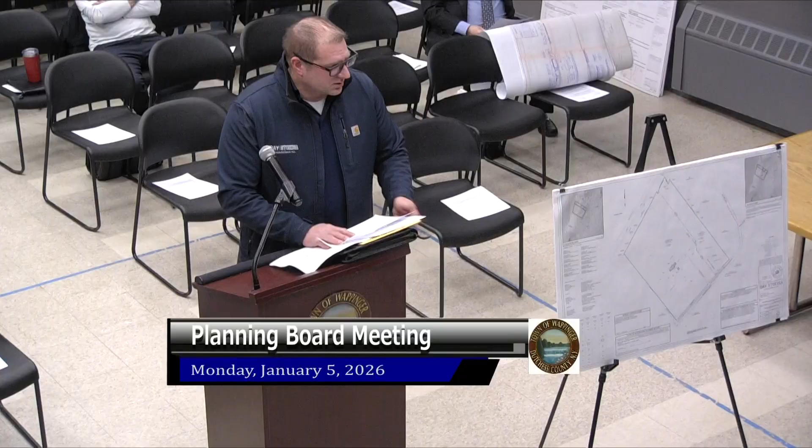Good evening, Brian Stokosa, Day Stokosa Engineering, here tonight. The applicant's here, Craig O'Donnell's in the audience. What we're proposing is we're starting with 2 lots and ending with 2 lots. We'd like to realign the vacant parcel along Wheeler Hill Road to give it a little bit more lot width for a larger style of home. There's no intent to build at this time, it could be for a grandchild or future relative, but there's no intent to design right now or construct. It's just to reshape the lot to accommodate a larger house. So that's what we're here for tonight, and we'll seek any public comment.

Okay, all right, so why don't we open up the floor for public comment? Is there anybody in the audience that would like to speak this evening regarding this application? Come up to the podium, please, and state your name and address for the record.

My name's Christopher Zaleski, 8 Skytop Drive, and I have formal copies of paperwork to submit to you all. Who should I bring that to? Hold on, let me ask you a question, you want to talk about the subdivision that's being proposed on Skytop Drive? That is correct. Currently this is a lot line realignment which is on Wheeler Hill Road. Oh, okay, that'll be coming up on the agenda next. Can I deliver these now while I'm up, or hold on to them? Just hold on to them, yeah.

Okay, so is there anybody else in the audience that has any comments? Yeah, I'm Craig O'Donnell, I live at 640 Wheeler Hill Road. I'm the applicant and owner of the property. I came here tonight to basically correct some misconceptions of what's going on down there.

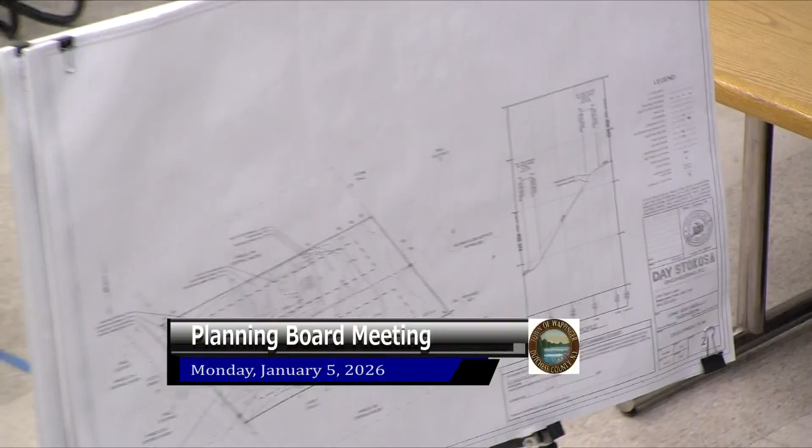This project was in front of the board previously. It's a single lot with an existing house on it along Skytop. Skytop Road is served by Central Water. The applicant would like to split the lot in half to create a new house for himself. The intent is to connect to Central Water with an on-site septic system.

The biggest thing we talked about at the last meeting was driveway location, sight distance, and drainage along the back of the property. We had a meeting out there with Christian and the highway superintendent, walked the property, and there is some drainage within the street that we can direct runoff to with a stub inlet pipe to corral any water that discharges from this property. So in concept we agreed on a drainage improvement out there, and tonight we'll just receive public hearing comments so we can revise the plan to reflect both our on-site meeting and any public comments tonight.

Okay, all right, so with that, we'll open the floor to public comment.

Can I bring these to somebody? I guess you could bring them up. Yeah, bring them up, we'll take a quick look. First give it to the secretary—she needs to have it for the record. And there's enough for everybody, I believe. Okay. Let's see, no, this is probably a different one.

My name's Christopher Zaleski. I live at 8 Skytop Drive, right across from the property looking to be subdivided. I rely on a shallow 20-foot gravel well located about 30 yards from the property. The site has clay loam soils and shows consistent surface water movement, especially noticeable during snow melt. Because of that, I'm concerned new construction could affect groundwater flow and nearby wells. I'm not opposed to the development—I'm simply asking that any approval include a hydraulic review and a condition requiring full mitigation if nearby wells are impacted, so homeowners can continue to use private well water. Thank you.

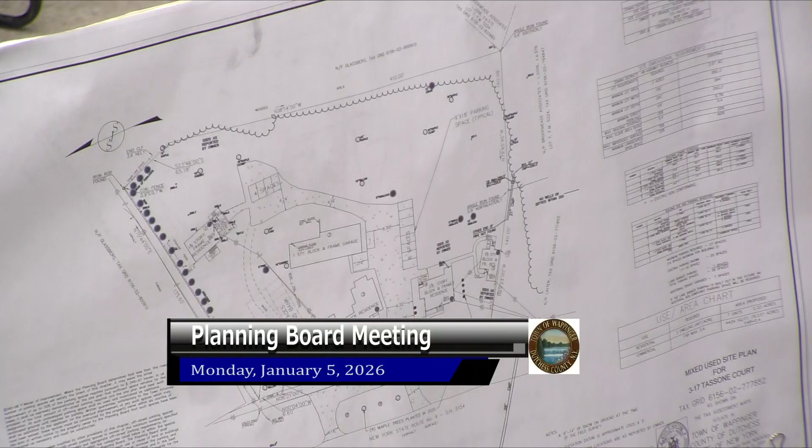Good evening everybody. The site is a 2.57 acre site in the Highway Business District, located along the east side of Route 9, known as 3 through 17 Tassone Court. There are 5 buildings on the site — one is a storage building, and one is being proposed to be used as a professional services building, which could also potentially be used as offices or retail. We've calculated the parking required for the site to come in at 27 spaces. We've proposed 20 spaces with seven spaces land banked on the site. There will be no new pavement and no land disturbance as part of the project. The project is strictly to legalize the uses that are existing on the site.

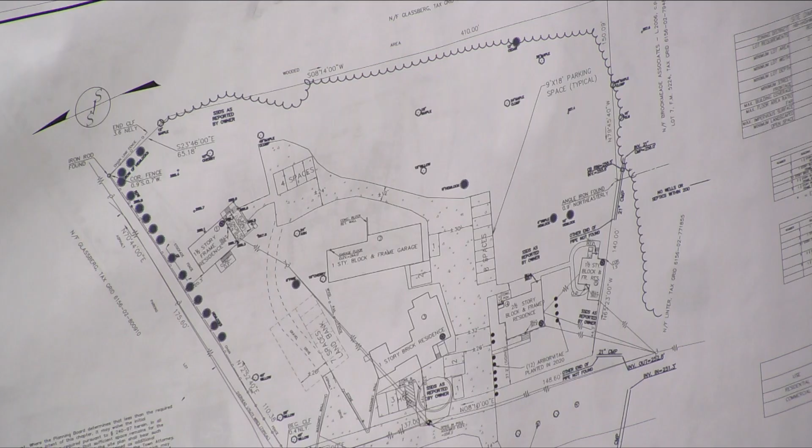All 5 of the buildings were built before, I think the newest building was built in the 60s. It's a mix of residential uses with storage in one building and then the retail building. That's pretty much it.

Just for the record, the storage is for the tenants, correct? All right, okay.

So with that, being this is a public hearing, we'll open up the floor for public comment. If there's anybody here tonight from the public that wishes to speak in regards to this application, please step up to the podium. All right, seeing none, I guess we'll move forward.

All right. Anybody from the board have any questions for the applicant at this point? No questions. Just, all right.

So there's a concern, I guess the only concern we had, which sounds like it might not even be a concern, is that with the storage in the separate building. As long as it's identified as storage for the residents only, and it's not an additional use to the property, I think that we're okay at this point.

So we might as well go ahead and close the public hearing. If anyone wants to make a motion to close it. Second. Motion is made, seconded, all in favor? Aye.

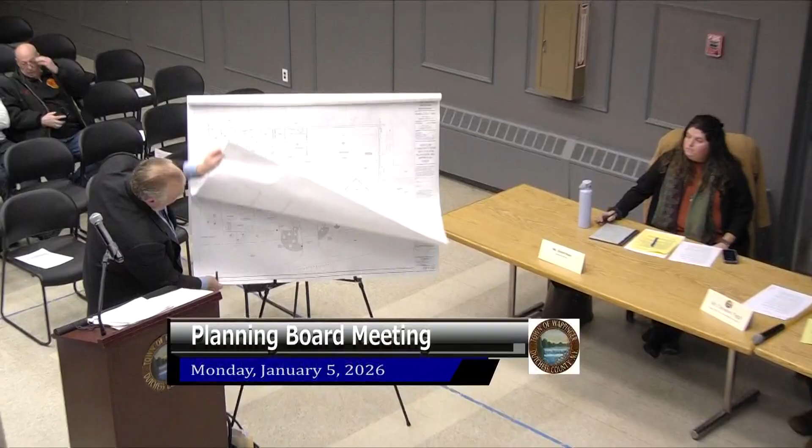Yep, so let me go to the site plan here. It's not shown on here, but there is a site plan. There is a sidewalk along Route 9, which is constructed. It goes up Scenic Drive and it wraps around and it comes across. There's a crossing here with a depressed curb at both radii into the site, and then it continues straight across.

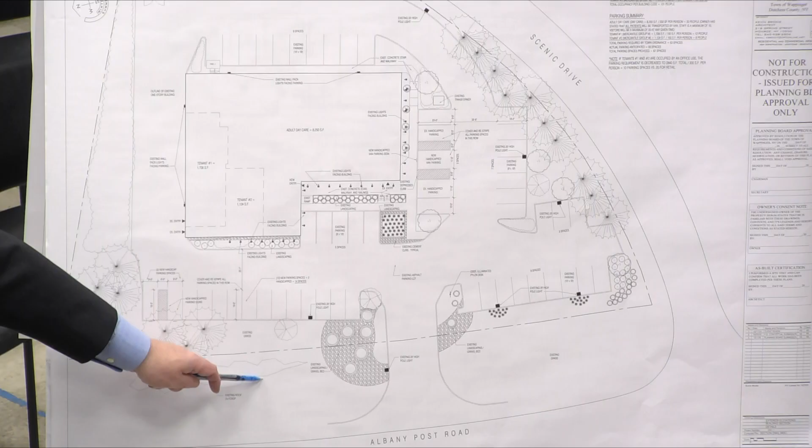And the bus stop is there at the corner, right? Between your entrance drive and the corner? If I can, I have some photographs here. To the left of the driveway? That's where it's marked, so it looks like - could be wrong too, I guess. It looks like the sidewalk was constructed very recently because the Google Maps view doesn't show a sidewalk, it shows it ending at the corner there. But then I have this photo, which shows clearly a sidewalk. This is to the left side of the entrance here, and then it continues across to the right side of the entrance with a sidewalk and curb cut there.

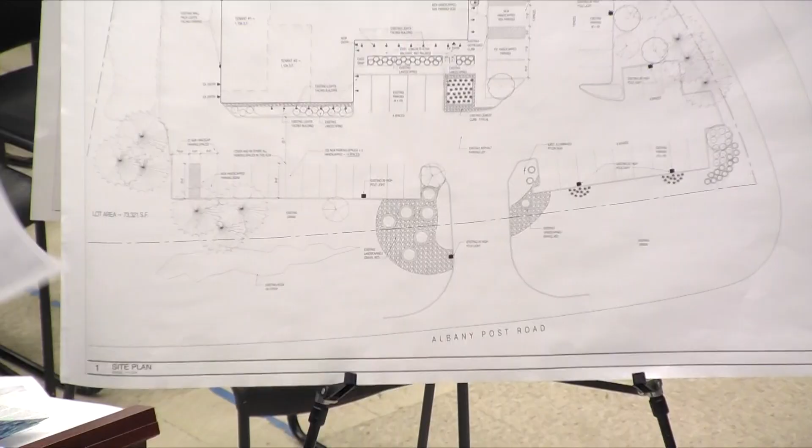This is 30 feet wide at the entry drive, which is a little oversized; 24 is kind of standard. So I think what the planner is suggesting is to maybe do a 4-foot striped area here that would continue up, around the curve, and then cut across to the entry there. I don't know how many bus passengers they're going to get, to be honest with you, and I also don't foresee this site being a particularly busy site with a lot of ingress and egress of cars, especially since the majority of all the patients are going to be brought in by ambulette or bus.

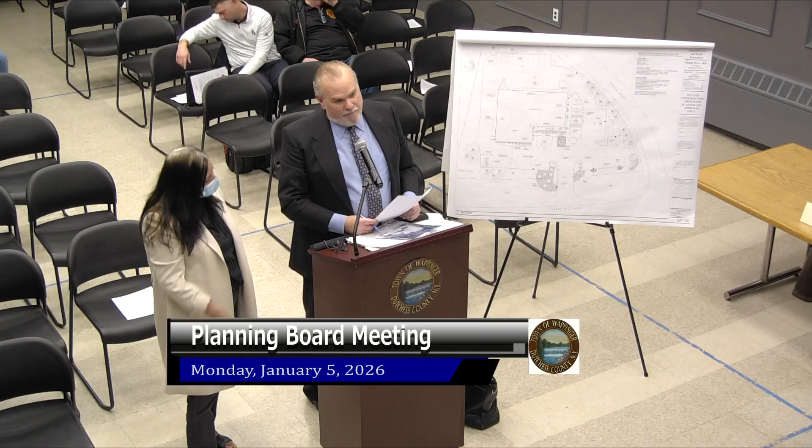Right, but you do have a retail or office component too. That might support having a pedestrian access. Sure, so I think maybe that's why they're looking at it as well. It's not just the one use, but it could be any of the uses, or possibly in the future something might change and this morphs into a different type of business that may be more reliant upon public transportation. We don't know, but I think they're just throwing it out there.

Is it something that's connecting the existing sidewalk into the property somehow? I guess, I know it's not a lot. I mean, we're restriping the whole parking lot, so it's not really a big deal if we have to add that, but it's really up to you and your opinion. What was the width of the driveway?

It's 30 feet wide. I think that was part of the comment, right? They've got the space, it lines up on the southern side of that entrance drive.

If there was a walkway, because the sidewalk has the ramp, it comes down to grade to the driveway, and then you're at grade all the way up. The only difference is that the walkway coming up from the parking lot does not have a ramp, that's not to grade, right? Yeah, the ramp is over here, by the handicap spaces. So we'd really have to walk back to the handicap walkway there. But I would assume we'd have to make that handicap accessible.

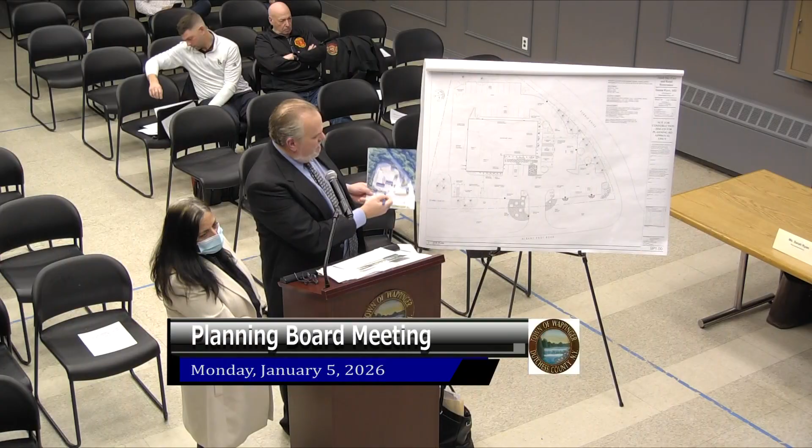It's on the north side of that driveway, right? That's on the south, correct, on the north side of the driveway. It's right here, I know. Sure, so there's a rock outcrop right here, that's what Google Maps is showing it as. If you look in reality it's just a grass patch, there's nothing there, so it's only a suggestion. I don't think it sees a lot of action.

We'd have to vote to not require it, let's put it that way. If it's a matter of putting concrete in the ground that's one thing, versus a matter of painting some crosswalk. I bet when they redid that whole walkway everybody's happy, paint the lines and be done with it. It's a difference, as long as they don't have to spend any real money on it.

Right, do you want to just talk about that? So if it's feasible to do it, which is painting some crosswalks, sure, and it'll slow people down in the parking lot a little bit too. It'd be something that would work, from the entry point going in you provide a crosswalk, paint everything out. I think that would satisfy the comment at that point. Absolutely, okay. So we're striping the parking lot anyway, right? We're going to restripe the whole parking lot, yeah.

Okay, so her other comment was about landscaping, and again that's up to you guys. We were planning on going in with the existing landscaping that's there, but I think the nature of the comment was that you're proposing to maintain the landscaping, but you're missing a landscaping schedule. So you have all the symbols on the plan, but I don't see a landscaping schedule detailing what those plantings are.

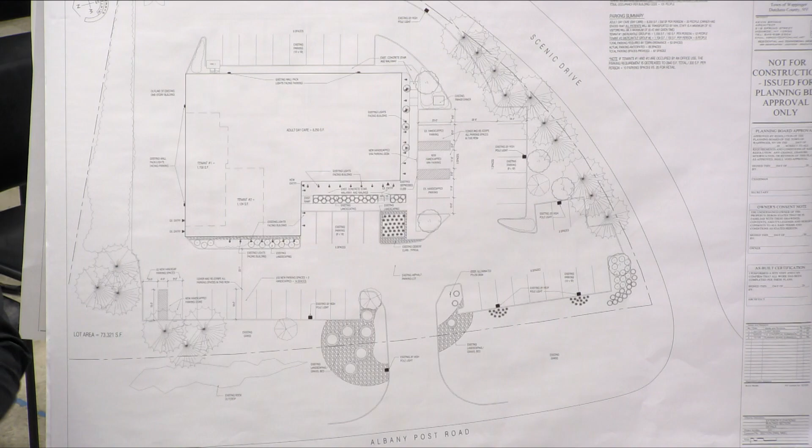That doesn't need to be a deal breaker, that doesn't need to change. I just wanted to highlight that you might not really be able to see that those businesses are there, and there isn't a walkway that leads you to it. So even from your perspective, you may want to consider extending your walkway, and you have the parking spaces to lose for extending it over to them. I don't know if you're proposing any signage to indicate to anyone. Not at the time, but we will as we go along. And I also know the nature of the tenants you're looking for would mean people will know these are here because they're using the rest of the site, but as proposed, those entrances will be relatively hidden, accessible but not obviously accessible.

And that's the end of my comments. So with the signage, have them propose possibly putting up the outline of what a sign might be that they'd be looking for. Right now they're not proposing any signage, they would come back for a signage permit under architectural review at a later date. I'm just saying, to avoid it in the future, because if we're approving everything and then they come back for just a sign, that becomes an issue. I agree with that. Right now those are future tenants, so it may be a while before they get tenants in there, so we'd do signage individually on that basis, but you could put a box showing where the sign will go.

Yeah, I could show that on the facade with a proposed size, just that way when the site is approved, it wouldn't have to come back here technically for another approval just for a sign.

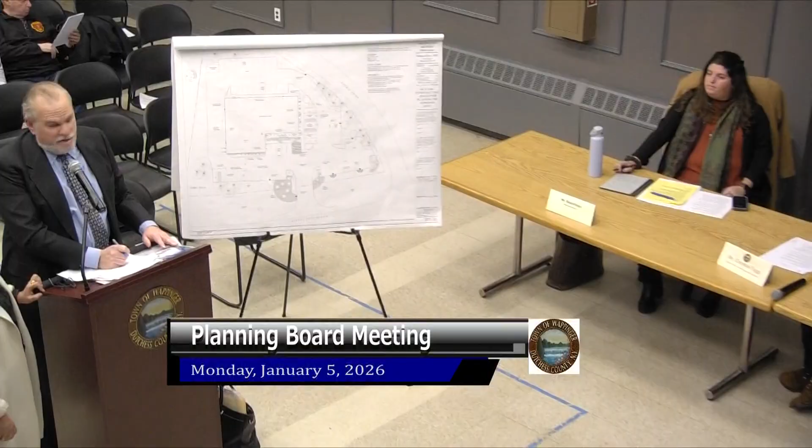Is there a monument sign on the site currently? There is, yeah, there's a pylon sign, illuminated pylon sign right here, which I think Dr. Rizvi does want to reuse. You're going to maintain that. Are you thinking about adding these other businesses, like little blocks underneath your primary sign? In the future, yeah, I think she would do that.

So for right now, we would submit. I think the idea is to get some preliminary approval from you guys before we go hire a sign company to start drawing the graphics and signage for this. That's at least where I was thinking. They may also want to put a sign on the building like there is right now. Obviously for that space, since you'll definitely use it, that would all be architectural. They could do it all now, but they don't need to.

You can come back later and look for changes to signage in the future. It just means another trip and another approval process, but a simpler one. Whatever you can wrap up with this process is a lot easier, and cheaper.

Waiver - does that stay with the property, or just for this use? Just for the use, I think. Just for, because if the change in use would change the parking, then they would have to come in for an amended site plan. So it's not like a variance, it's just for this particular site plan. Right, so if they change the use in the future and make it like a nightclub, there's going to be a requirement for more parking, and then they would have to come back to us.

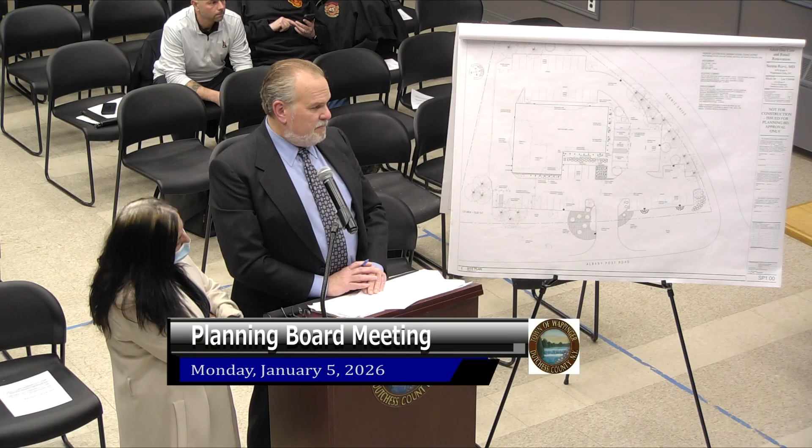Recommend fire department emergency services - that's up to you. Question on that, these are from our office. The reason why I raised that is not necessarily an engineering issue, the emergency services, but from experience with similar applications in the past, having to do with assisted living facilities or something like this that could put additional strain on the emergency services. How many - what is the occupancy of the facility? You want to answer? It's 20 patients at a time?

This is Dr. Seema Rizvi. Everyone can hear me? Hi. Good evening, everyone. First, I would like to thank all of you for being very supportive at the last meeting I had. So thanks for your support.

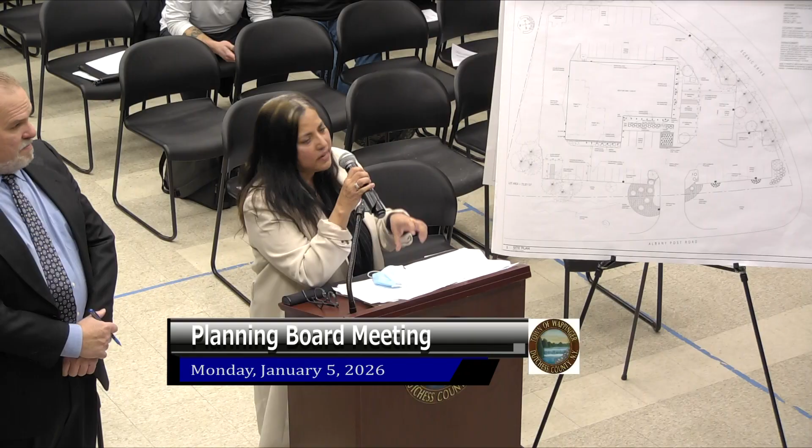So this is a mid-level daycare, and it is very different from assisted living. The idea is that because of older adults' decrease in functional status and comorbid illness, they end up in the hospital, but then when they go back home, they are in isolation and in despair because it gets very difficult for family members to be there for them all the time.

So this is going to be to give them psychosocial support and mental health care, and also the medical care. So this is going to be like a geriatric clinic also, where I will be basically the main geriatric person.

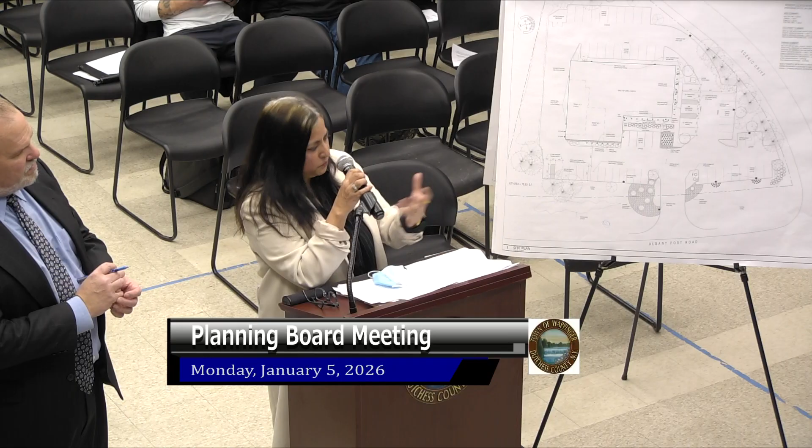With some specialists I will try to get in also. So this is different from assisted living because here they will be there only for 5-6 hours, or 4 hours depending on them. They are not going to get too much water consumption because they are there just to get a little breakfast or meal, but it is all ready-made kind of things.

And regarding your question about the emergency service - if any one of your patients or tenants had a health emergency that required some sort of 911 response or ambulance response, I'm not sure if this type of facility would have more instances of emergency response.

So let me interrupt you. This application has to go in front of the Fire Prevention Bureau, which is made up of the three different fire districts in the town. They're the ones that are going to review it. They're going to make the comments.

They're having their meeting tomorrow night? Perfect. So after that meeting, we'll get comments back from them. That was my only concern. I think that's exactly the normal process, that's the way it's always been. So every application, initially, they get the application, they review it, give us some comments. Unfortunately, with the holidays, it seems like we're a little ahead of them.

Okay, good. So, all right, I don't think it's going to be an issue. They'll review it, and if they have comments, they will. We will end up getting a copy of those comments to you as well, so that you could start addressing it either with them or with us, depending upon what the issue is.

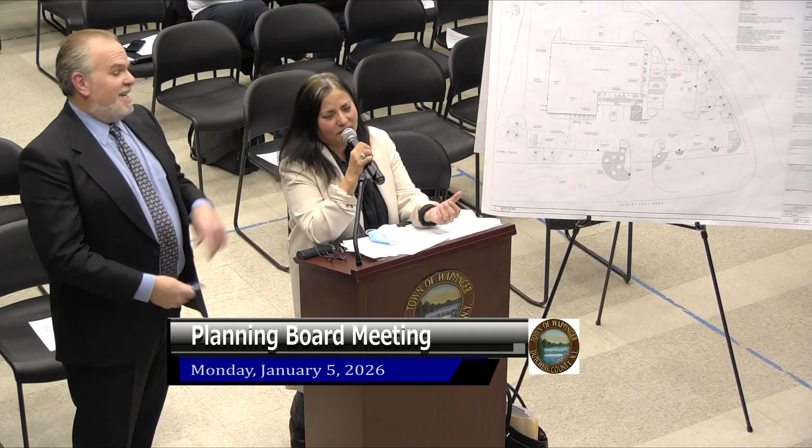Yeah, so my only request is, it's a little time-sensitive matter because I have a lot of pressure from the seller. So I would appreciate if I can get all these things so I can get it done. The contingency basis runs out at the end of the month, so I'm going to ask for another month.

Because it's like seller pressure I'm getting, so just a request. As far as the site's capability of supporting this, did you get some feedback from the health department? No, but I'm connected to them also. I only have two comments I need to talk about: one is the health department feedback, and the other is the contents of the site plan. Yeah, definitely I will provide that too. I'm working on it.

Any other? Yeah, I think you just wanted to continue going through the water and sewer. Okay, so for the site plan, fire department map reference, that would hopefully come from locating the original site plan, and that would have the map reference on it.

Now, this next one, item 4, revise the site plan to include all items identified under Town Code Section 240-84, including existing utilities and topography. I was just wondering why we need that now. I understand septic and well, that's a separate issue which is going to come up next, but why would we need that if we're not changing any of that?

So you can request waivers, and it's something the board considers. If the previously approved plan already has them on there, then it's really a moot issue at that point, so nothing would have changed. Showing existing utilities? That was the previously approved plan, and that did not have it.